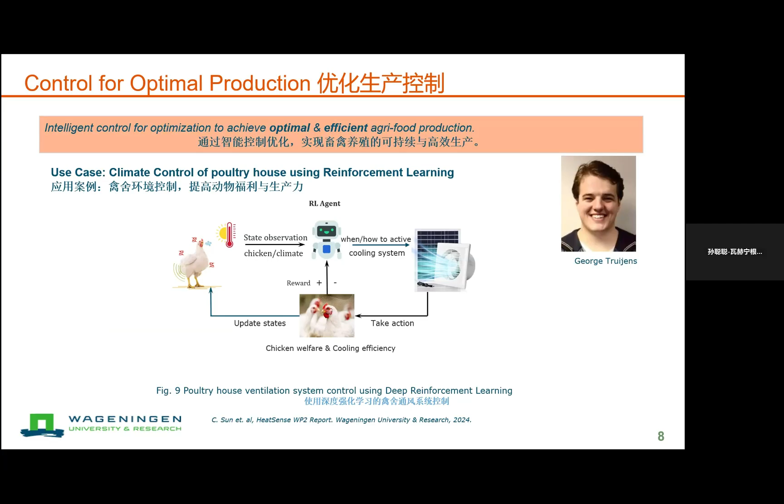We also can use control to reduce the ammonia release from the house into the environment, because as we know, the ammonia and methane - this kind of greenhouse gas emission - the livestock industry accounts for 1/3 of this release. So it's very important to reduce the emission using control techniques.

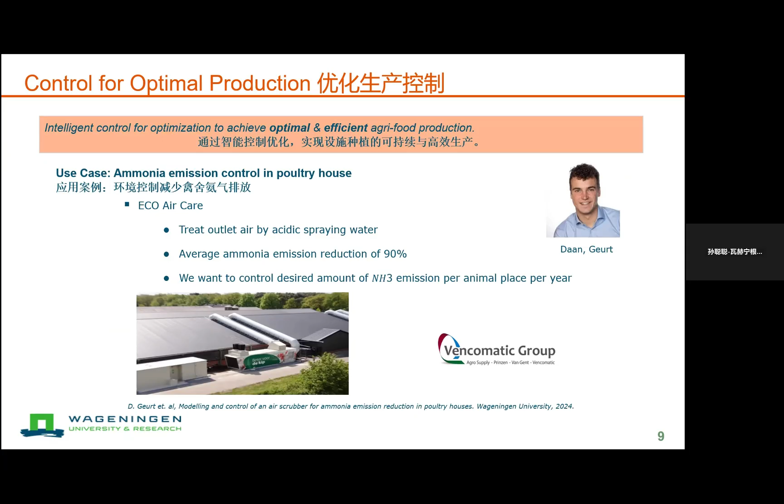We are also trying to integrate animal production and greenhouse production together with the energy and water sectors, in order to reuse the waste and also minimize the impact and to achieve transition of the agriculture production.

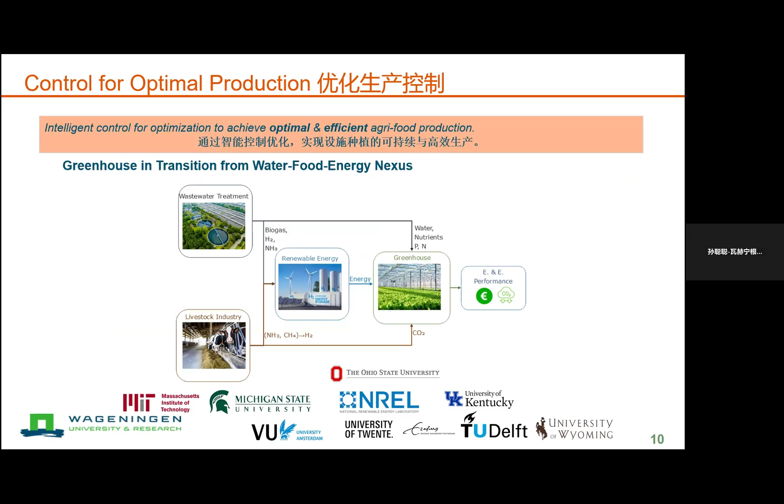Another important application is for robotics. Here we mainly talk about how to plan the working paths and how to control the machines, the vehicles, in order to keep them working optimally and also safely.

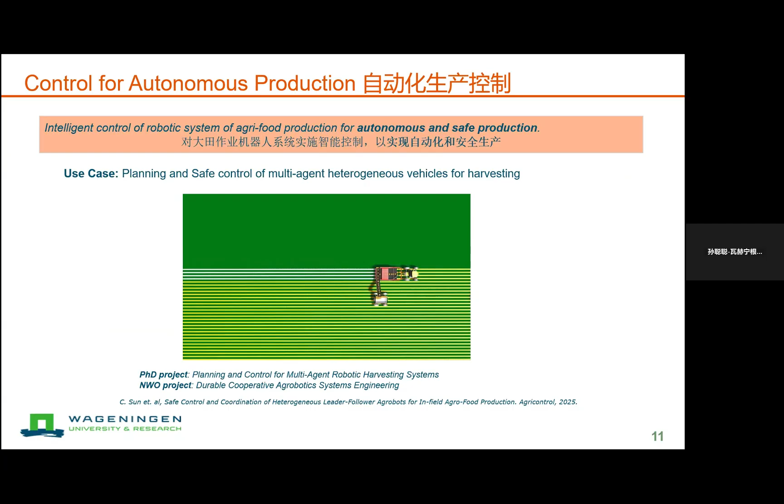For example, nowadays in arable farms, we're trying to use multiple agents, multiple vehicles, smaller vehicles to achieve the operation, because smaller machines can reduce soil compaction to keep production more sustainable. In this way, we really need to plan the working paths of each machine to make them work cooperatively and also keep a safety distance from each other.

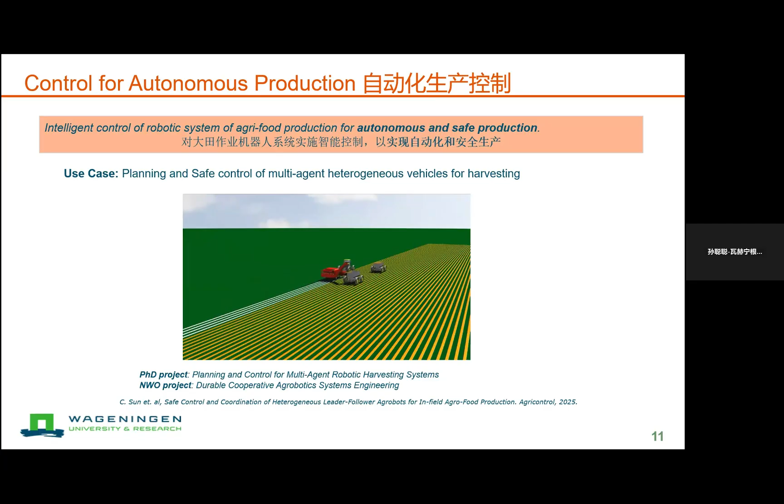Another use case is in the animal house, we use manure cleaning robots to clean the floors. This way we can keep the environment for the animals comfortable, reduce their disease, and also reduce emissions to the environment.

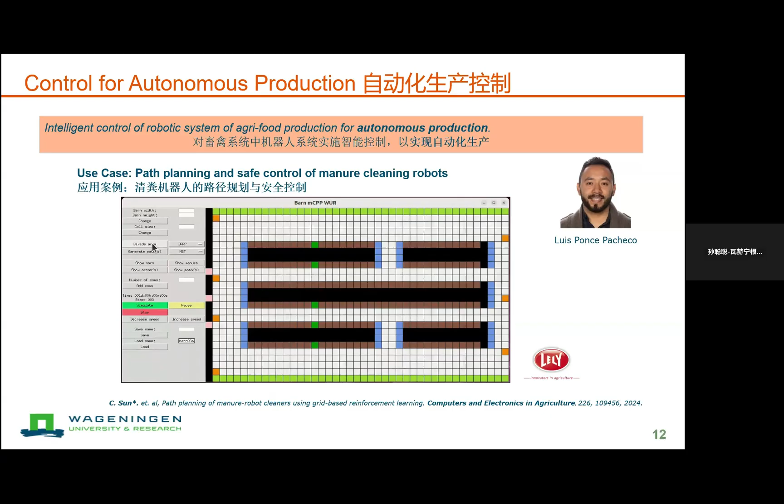In this project, we are trying to first build an environment where users can design the layout of their animal house or barn, select the number of animals and the number of cleaning robots, and select the algorithm. Then you can plan the working path for each robot and control it in order to optimize the cleaning task while keeping the animals safe.

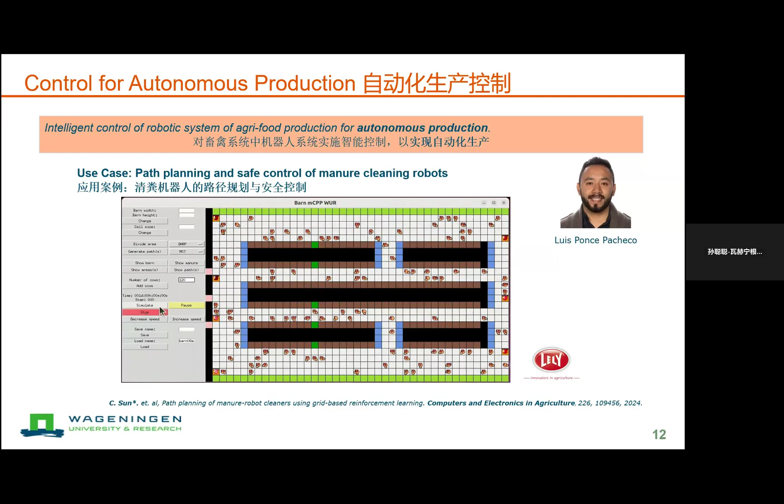Here is the tool we developed. Using this tool, you can know which algorithm will have which kind of performance after the simulation.

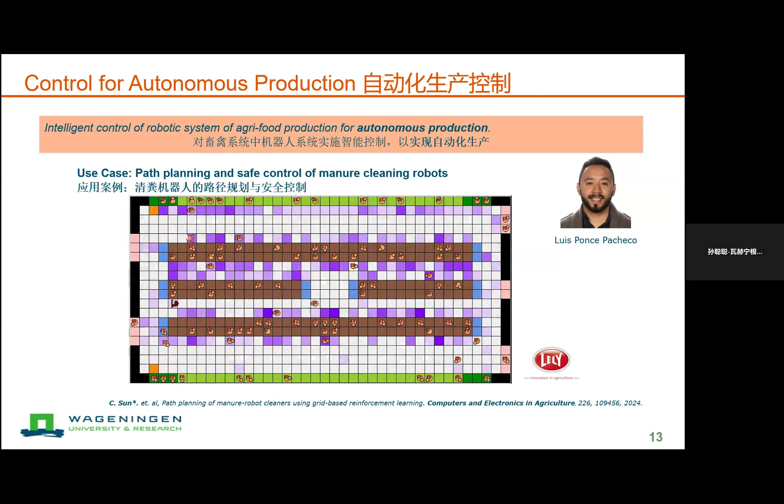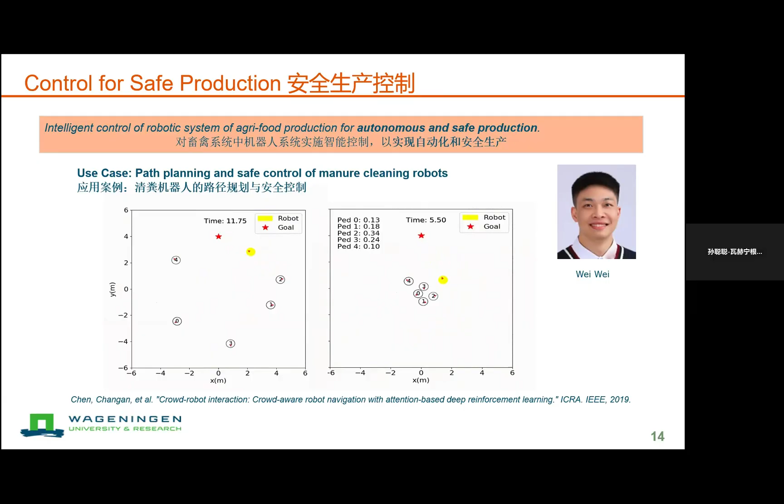At the same time, we're also trying, as I said, to keep safe control of the manure cleaning robot. So when we plan the cleaning path for the robot and it meets a group of animals, it will try to re-navigate the path in order to not affect the daily life of the animals. In this work, we mostly use reinforcement learning for the planning and control, and we can showcase some preliminary results.

For example, when the robot is crowded by a group of cows, using our planning algorithms we can re-navigate a new path without affecting any of the cows and continue the cleaning task.

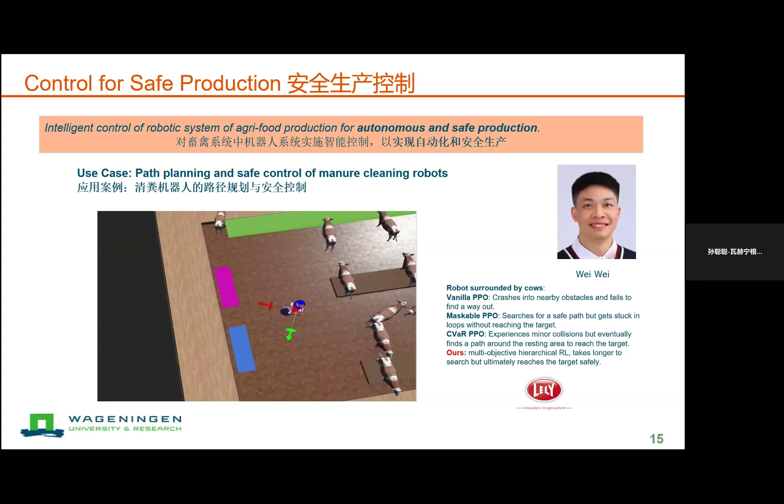This work is first finished in simulation, and after that we will move it to application. In general, the work is collaborated with some robot companies like Lely.

Besides, we are also working for sustainable production. This is one ongoing project about developing biodegradable soil sensors for future agriculture, because if we want to achieve digital or intelligent agriculture, we will need a lot of sensors, and that will cause a kind of electronic pollution. So we're trying to produce sensors which can be biodegradable, and after a few years they will be digested by the soil.

I can show you a short video about what we want to do in this project.

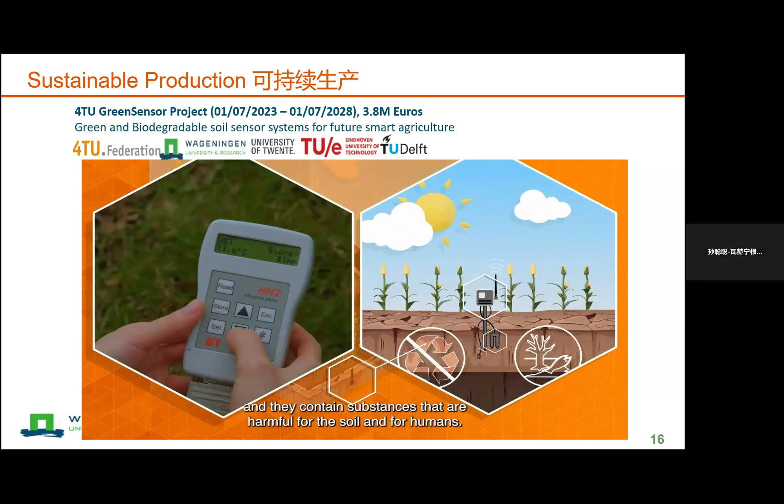Tomorrow's agriculture is highly technical, using state-of-the-art techniques that make food production sustainable. It is necessary in a world with challenges like climate change, soil degradation, and resource depletion. We already use sensors to measure water and nutrient content in the soil, and to plan harvests so that the soil is optimally used. Existing sensors are difficult to recycle, and they contain substances that are harmful for the soil and for humans. We need to make sure that we can use sensors based on a biodegradable concept and eliminate e-waste.

Green Sensors proposes a new approach. It aims to develop soil sensing technology that is fully biodegradable and not harmful to nature. There is no need to recover and recycle the sensors; you can just leave them in the ground. We envision the distribution of a dense sensor network to get better insight into the variation in the field. Insight into this variation will allow better local management. Yet dense sensor networks are easily distributed but less easily recollected from the field. Here is where the biodegradable sensor networks come in.

On top of that, we want to start a green Internet of Things movement for agriculture, acquiring targeted information from data we can use to determine the smartest way of farming. This optimizes harvests using the right dosages of water and fertilizer and proper timing. The green sensors already fit into the cycle of nature. They will be made of natural materials, such as wood, natural polymers, and wax. They do their job for a certain period and then degrade fully over time.

In the future, data plays a vital role in sustainable agriculture. This will result in better crops, better usage of soil, and higher yields, using less resources and without polluting. Green Sensors is the future of sensing in agriculture, and it will be the preferred technology, both in cost and in sustainability. Do you want to work on innovation and contribute to the future of agriculture?